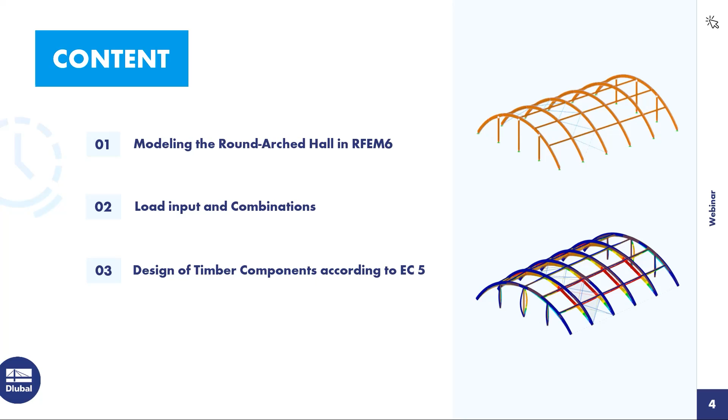To proceed with our project, I would like to go to our program RFEM 6. Here I need to create a new model, which I will name Round-Arched Hall.

The add-ons that we will need today are the timber design and also the structure stability. We also need to pick our standards. We will need the European standards for timber, also with the German National Annex. We can continue by clicking OK.

There is a possibility that for the latest projects you've done in RFEM 6, you would have here the materials or also the sections that you used before. To delete them, you can just go to the basic objects and select delete all basic objects. In this way, everything is deleted and we can continue with the model of our hall.

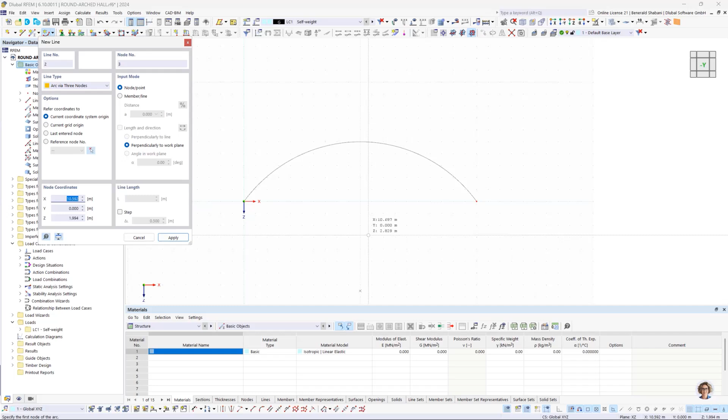First, I will need to draw an arc. To do that, I will pick here an arc via 3 nodes. Our hall needs to have a height of 5 meters and also a 20 meter wingspan. We have modeled our arc.

Now we need to have a member from it. Of course, we need to select a new section and also a new material.

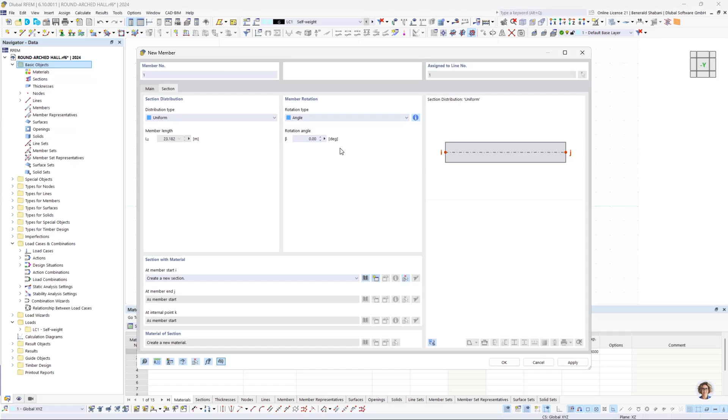We will search here in our library for the region European Union and a material type of timber. For our round arch hall, we would need a glue laminated timber, a GL28C.

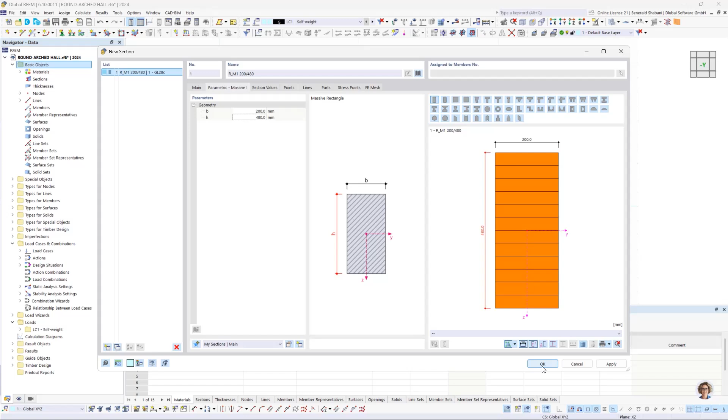As a section type, we will choose Massive 1 for us to be able to just write our geometry. In this case, we need the geometry of 200 millimeters times 480 millimeters. Say apply and OK.

And we can see that we have our truss. Of course, our truss also needs the hinge nodal support.

We just need to select the nodes and we will have our nodal support modeled. We can also see that they are a bit too small for the model to look better and for us to be able to see it in a better way. We can just make them a bit bigger. That would also look better and give us a better eyesight into the program.

Next, we want to divide our truss into intermediate nodes. We will divide it into 5 intermediate nodes. We need the nodes for the coupling. They are very important because the coupling rods should be located at these points where the nodes would be.

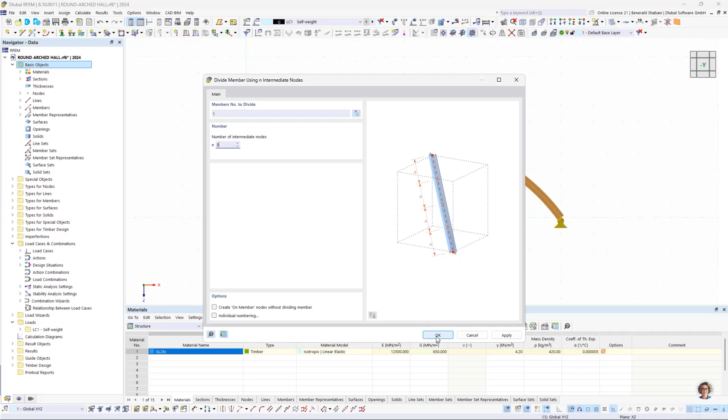We can copy the truss. When we copy the truss, we will also create the coupling rods. But we'll proceed here first with OK. We'll see that our member is divided into 5 nodes, 5 intermediate nodes.

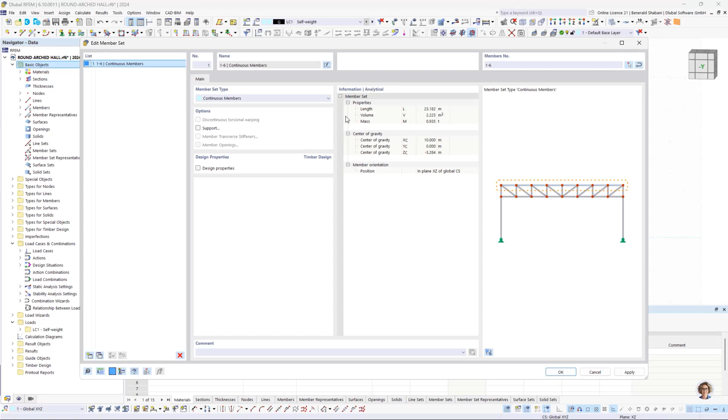Before we copy it, we first need to create a member set. Here we don't need to do anything, we just press OK, and we can see that we already created a new member set. Now we can be ready to copy our member.

To do that, we will need to check here, create copy. And for our round arch hall, we will need 5 number of copies. But as we said, where the nodes are, we will also need to have the couplings.

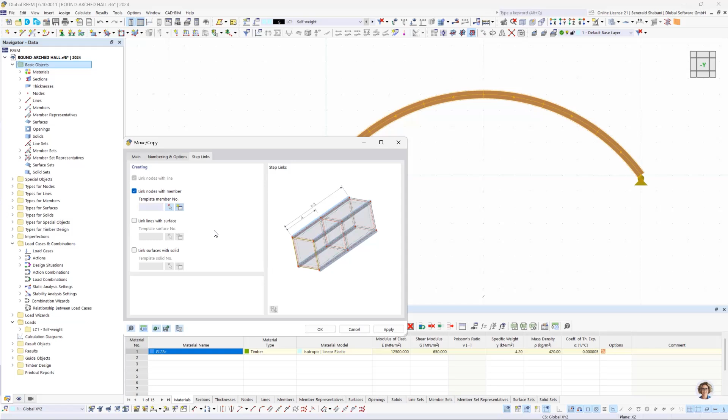Instead of modeling each one of them, we can proceed here at the menu numbering and options and check step links. Then we say here link nodes with line and also nodes with the member. Of course, here we need to also find another type of section. We go to the sections, but firstly, we need to choose our member type as truss.

We can add a new section here and say for the truss I need a geometry of 120 millimeters times 120 millimeters. We'll press OK. The material is also the same, so we don't need to change it. We just can proceed with OK.

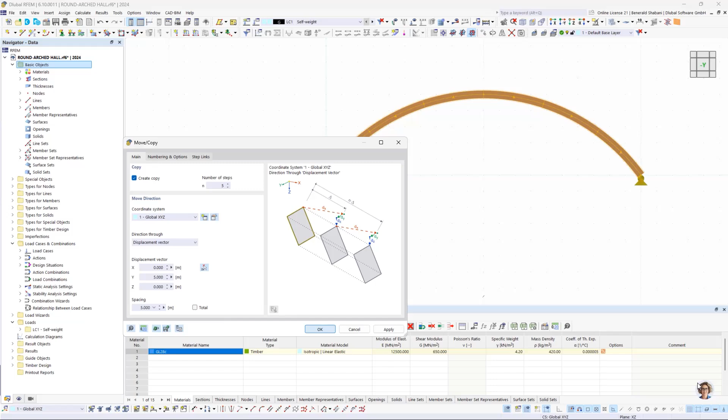And we say that I want to have my copies in Y direction every 5 meters. We'll press OK, and then we will see that our round arched hall would be modeled.

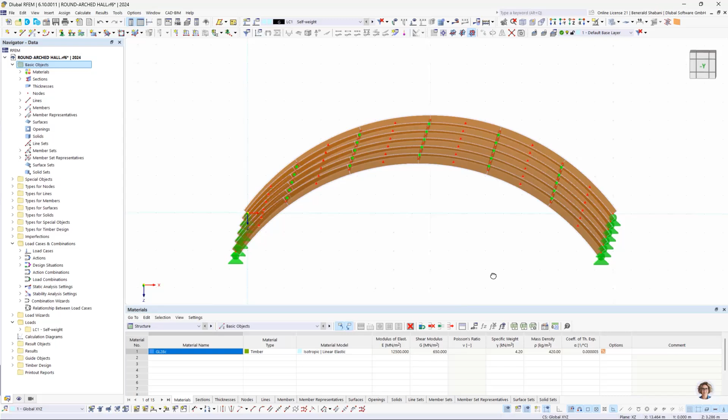Of course, the trusses here at the bottom, we don't need them, but I think it's faster this way for us just to delete them, so we can just delete them. Of course, we could have also deselected the nodes here before, but yeah, that would be just unneeded work.

We can see that our hall is partially modeled. The next thing to do is to model here the beams that will serve as gable support. To do that, I will need to find another section, but this time not anymore as a truss, but as a normal beam.

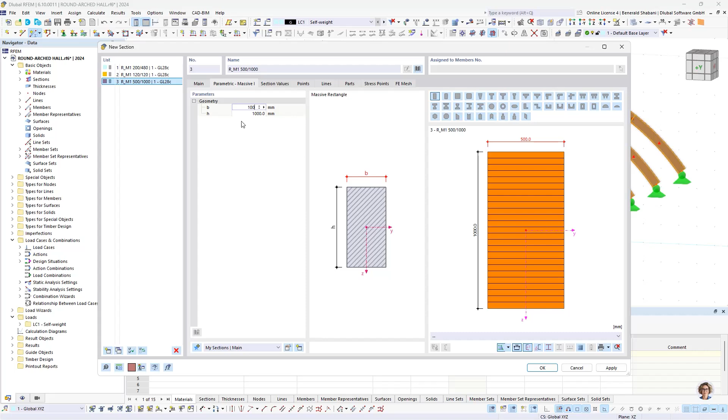Of course, for our gable supports, we will need to choose a new section, which will have the geometry of 100 millimeters times 200 millimeters. We can press here OK to proceed. The material of the gable supports can still be the same, so we don't need to change anything here.

I will first start to model them as shorter beams, and then later I will extend them until the next member. Of course, they also need their personal hinged nodal support. We can select the nodes and proceed with OK.

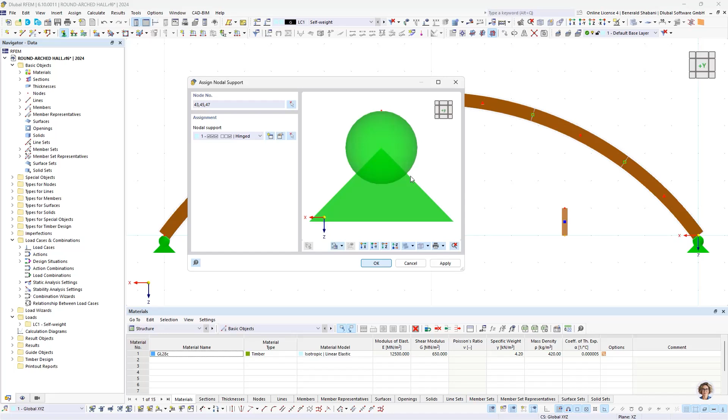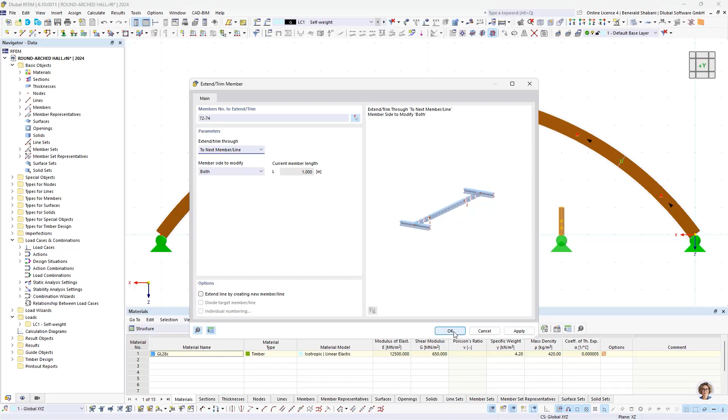To extend the gable supports until the next member, we need to select all three of them. We can find here extend or trim member until through the next member or line. We can just proceed here with OK, and we can see that our gable supports are extended to the next member.

We also need to turn the gable supports. We need to rotate them in a 90 degrees angle. That way the major axis will be in the longitudinal direction. To do that, we need to edit all three of them.

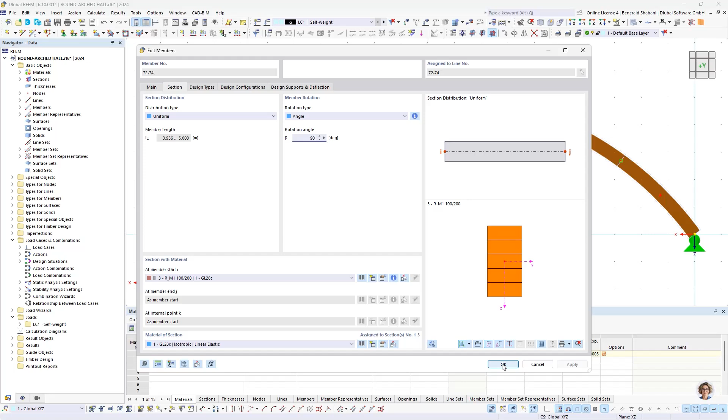We will go to the sections menu, and here we can see a part that says member rotation. Here we can just type rotation angle of 90 degrees and then press OK. We can see that our gable supports are rotated in a 90 degrees angle.

At the top, the gable support should be connected with hinges that also can be moved vertically. Later, the gable supports can be removed, for example, when the hall needs to be extended. To do that, we should edit all three of them.

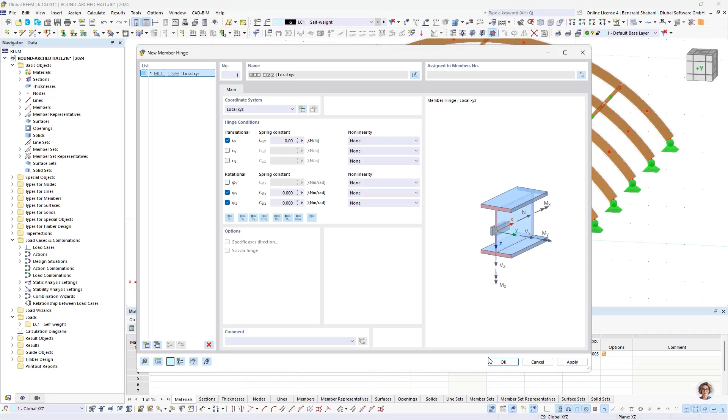And we need to check here the menu hinges. The hinges would be needed at the member end, so we will choose a new one. Therefore, we need a moment hinge around the longitudinal axis, which essentially doesn't impose any vertical loads. We will proceed here with OK. And then we can see that we have already modeled our hinges.

Of course, we need the gable supports also for the other part, so we just can copy them. We will select everything that we need to copy and go to the menu Move or Copy. We'll select here the menu of Create, Copy, and we will need just one copy. Here you need to also be careful because...

For the trusses, we also needed the couplings, and probably there is a possibility that this option is still on, so we just need to turn it off. In our case, it isn't like that.

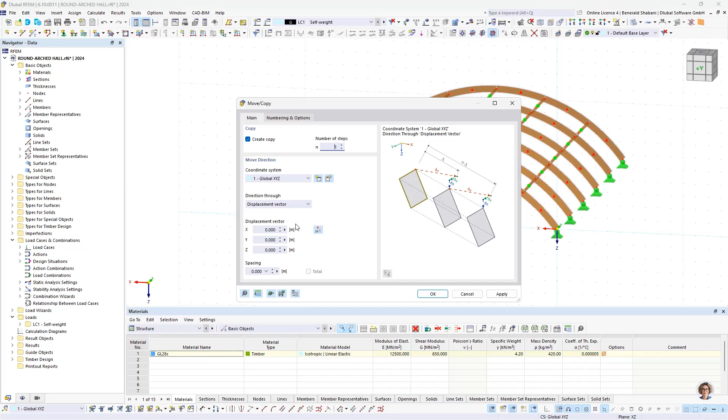We can choose our displacement vector just by choosing 2 points on our model. The first point that I will choose would be the original point, and the next point where I want the things to be copied. We'll say here OK, and then we can see that the gable supports are also modeled for the other side.

The next thing I want to do is I want the connecting rods to align along the top edge of the truss so that each rod has a different angle. To do that, I need to align them toward the center of this arc, of this truss. How does this work? We can find it now.

In our example, we can see the middle point of this arc. But if in your model you cannot see it, you can just go to the display navigator and search here for lines. And here you would see a menu that says center point. You can just turn this on and then you will see this small sign. Here I just need to put a node as a helping node.

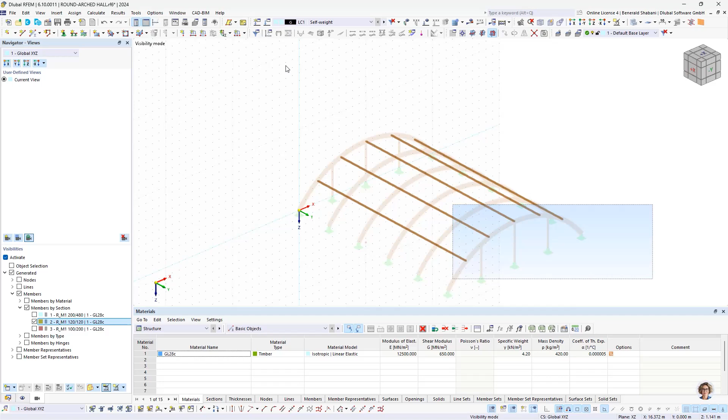And then I also need to select all the rods. You can do it in a lot of ways, just by selecting here or going to the views by visibilities. We can activate them and then search for members by section. We know that our rods have a section of 120 millimeters times 120 millimeters, so we can just see them. We select everything and then deactivate the visibilities. Now we can edit all of them.

At the menu member rotation, as a rotation type, I don't need an angle anymore, but I need a help node. We know which node we are going to select, and in the plane X until Z. We'll say OK, and then we will see that our rods have now an angle, a different angle from one another. They are also the same way as I wanted them to have.

Now, the thing that I need to do is the bracing. For that, I will create another section. As a member type, I will use tensions.

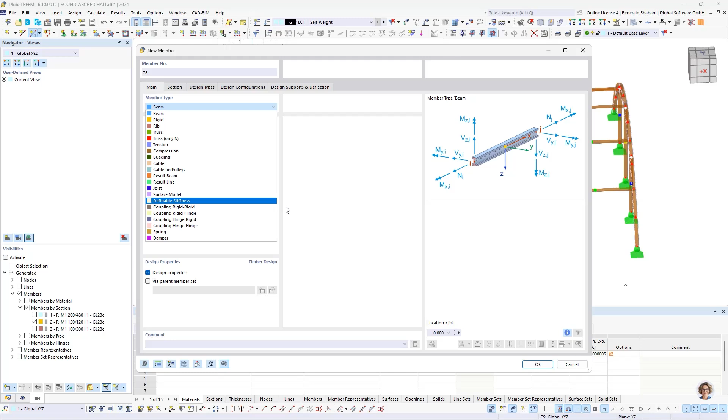Here I also need to find another section and also another material. Firstly, I will choose the next material. I will need a material for steel. Here we go firstly to the library, and as material type, I will search for steel. I can also type here S235.

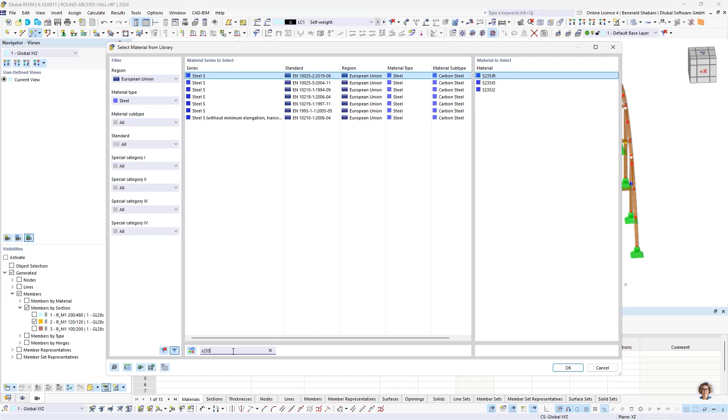I can press here OK, and now I need to look for a new section. For our bracing, I would need a round. As a section type, I would need a massive one, so I can give the diametry by myself, and I will also need a round section. We'll need a diametry from 16 millimeters. We can proceed here with OK.

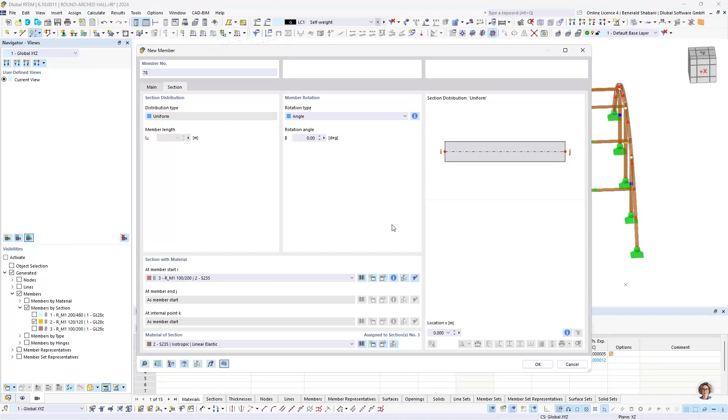And then we can start to model it. For it to be easier for us, I can put our model into a wireframe model, so I can see every node and every line that I also need to select.

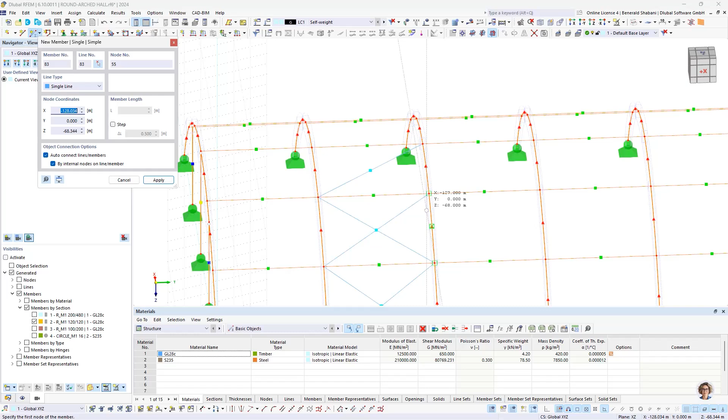Modeling the bracing can be done like this, or you can draw just one of them and then mirror the other side, or with a rotation. There is a lot of ways how to draw them. In our example, I will draw them until here, and then I want to mirror them for also the other side.

To select all of them, I just click at the blue member representatives, and then I will go to the menu mirror. I will also need a copy from it and select the plane Y, Z. I will also need to pick a point here, which would be the node here, and just press OK. We can see that our round arch hall is fully modeled.

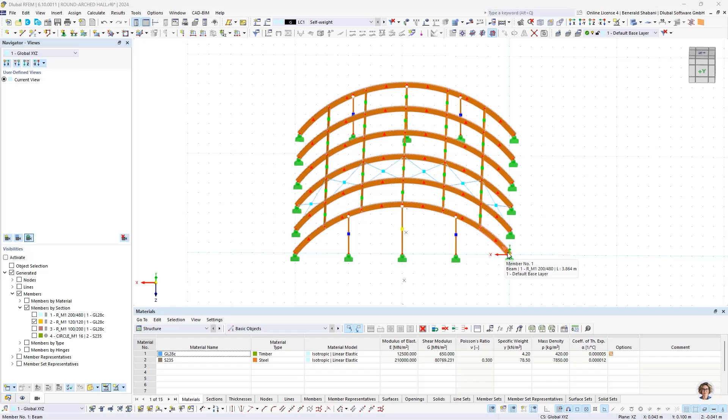Now we come to the second part of our webinar, which is also the last input. To proceed with that, I will firstly need to model at the gable supports two load transfer areas, which will help with the load transfer. They are probably the biggest advantage that we have today in RFEM and that we also use in our model. Because of the roof construction, there are triangular and trapezoidal loads that apply to the gable supports. Without the load transfer area, we would have to apply the triangular and other types of loads individually. That would be a waste of time, and it would also be a lot harder than just putting it with the load transfer.

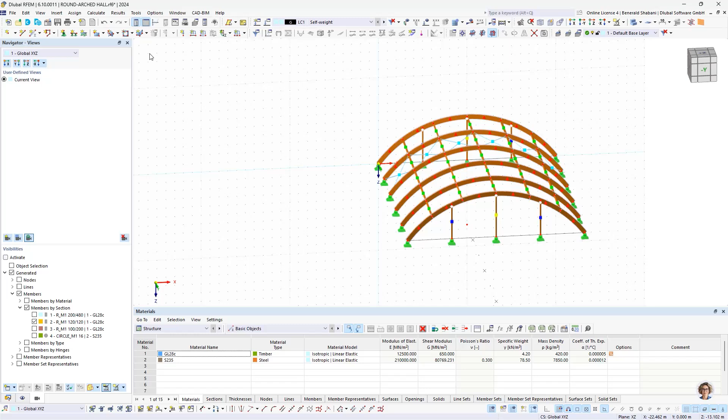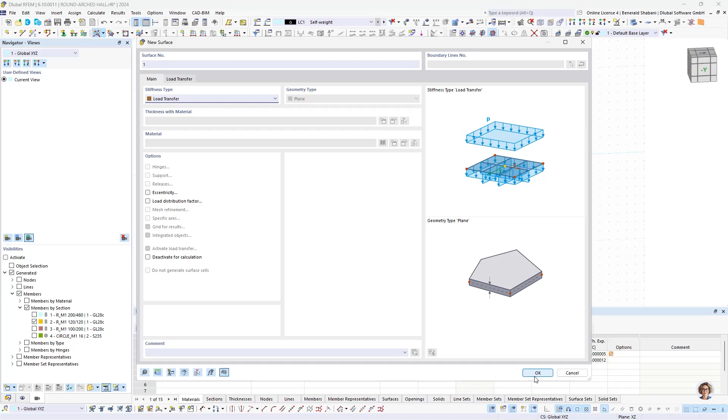First of all, I will need to draw here a line which would help me and serve as the borders of the load transfer area. Second, I can just go to the menu here and select boundary. As a stiffness type, I will need a load transfer. As you can see, I cannot say that I want a thickness or a material because it's a surface that is not there in reality. It's just there in our program to help us with the load transfer. We will continue with OK, and then we will select our boundaries.

We can see that we modeled our first load transfer area, and now we proceed with the second one. Now we also have the second one.

Our hall spans in the x-axis. That's why we also need to go to the load transfer and select the category as load transfer direction just in x stripes. That means that the surface is cut along the local axis into many surface stripes. The local axis we can see if we just put the mouse near the load transfer, and then you can see the axis. The same thing we also need to do for the next load transfer area, and then we can proceed with OK.

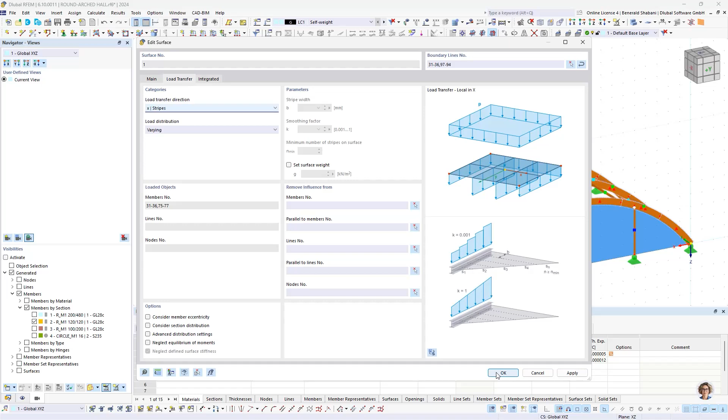As the first load, I will need here dead load and also the roof structure.

I figured that here from truss to truss there would be trapezoidal profiles like sandwiches with insulation on top and a foil roof. I assumed it will weigh like 30 kilograms. Of course, the dead load can vary from hall to hall.

I would need a new member set load and type here 1.5 kilonewtons per meter. As a load direction, it's global and Z on true length. And now I just need to select my member sets.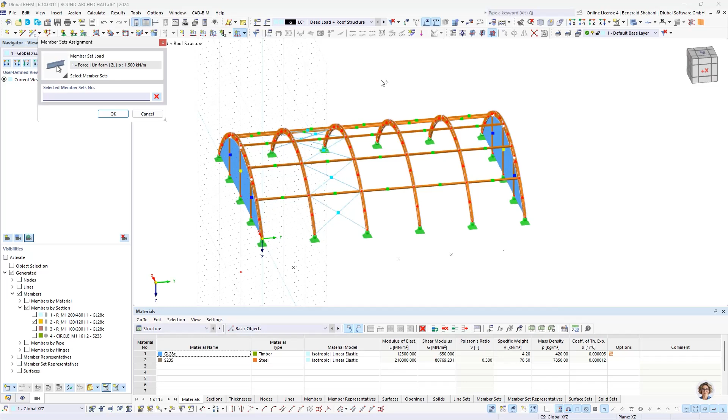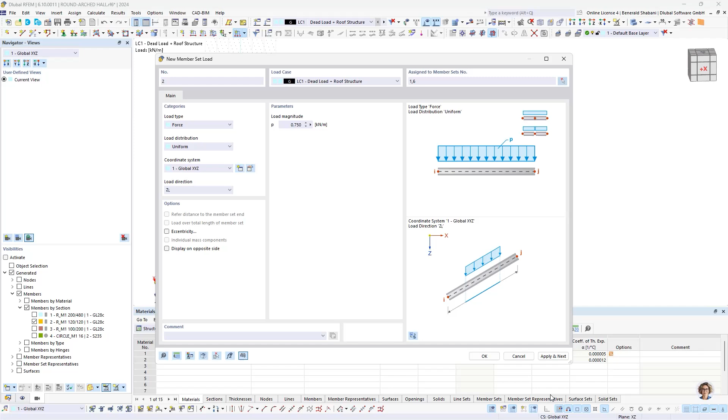We will press OK, and then we can see our load being generated. Of course, at the gable supports, it will be half the load. So we go and select a new member set load and put just half of it. We will proceed with OK. Then we will be done with the dead load and the roof structure load.

To proceed with the snow load, I would like to go to my presentation. The snow load will proceed according to DIN EN 1991-1-3, Section 5.3.5 for the barrel roofs. These standards specify two variants that must be considered: the unblown snow and the drifted snow load.

We must represent these two variants using two load cases: firstly, the snow load as a distributed load, and also the drifted snow load as a double triangular load. I cannot show the standards here because of copyright, but we have the form coefficient, the characteristic snow load, and also the influence width, that for the unblown snow equals 3.4 kilonewton per meter as a member set load.

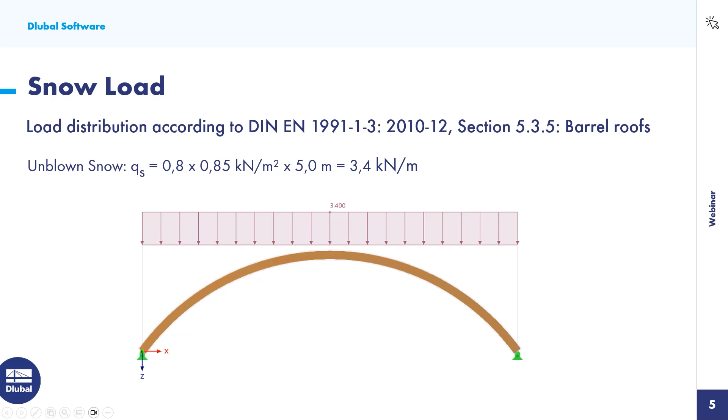For the drifted snow, of course, we have different form coefficients. Here we have a 2.0, which will equal 8.5 kilonewtons per meter, and also as a second part, the half of it.

To proceed with the snow load, I will also go again to the program and select here a new load case. As an action category, I will need to choose here snow and confirm with OK.

Of course, I will need a new member set load, and then type here 3.4 kilonewtons per meter. Now, as a load direction, according to standards, I need to choose a load direction global in Z on projected length.

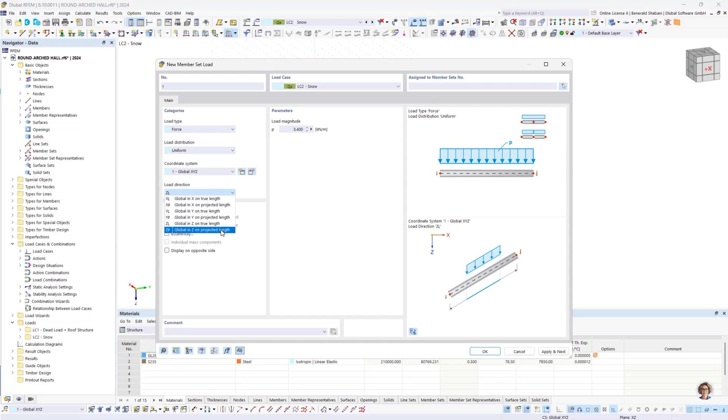And now we just need to select our members. We can proceed here with OK, apply and next, and then we can see that our load for the main trusses is modeled.

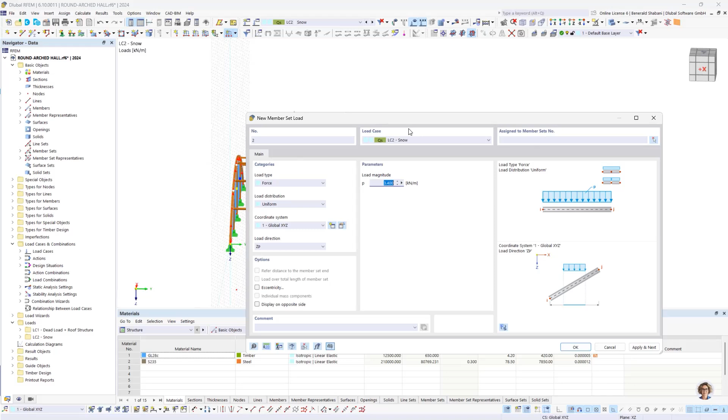And then say here that at the gable supports, I have just half of it. We also select the gable supports and then proceed with OK. This way we are done with the unblown snow load.

Now we can proceed with a new snow case, which is the drifted load. Of course, I need to put here a new load case, which I will name drifted snow load.

As an action category, it can stay this way, I don't need to change it. I just need to proceed with OK. And then select here once again, new member set load.

We said that here we have a double triangular load. So to be able to put this type of load into our program, we need to choose as a load distribution varying, and then we can just type our parameters by ourselves.

Then we start here at 0 meters, which we also have a force of 0 kilonewton. At 5 meters, which will be the first value of our load. Here we have half of it.

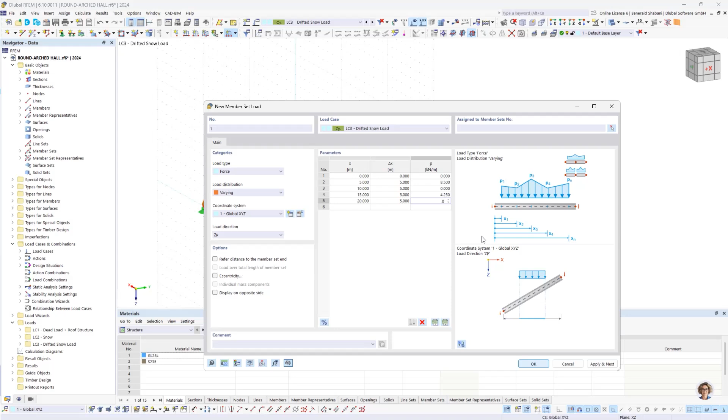Now we just need to choose once again the members that we need the loads on. We can proceed here with apply and next and see our load generated. Of course, at the gable trusses, we need half of it. We can proceed here with OK, and yet we are done with the drifted snow load.

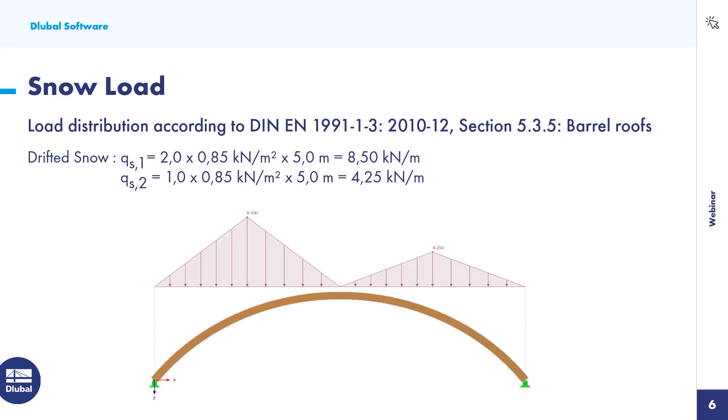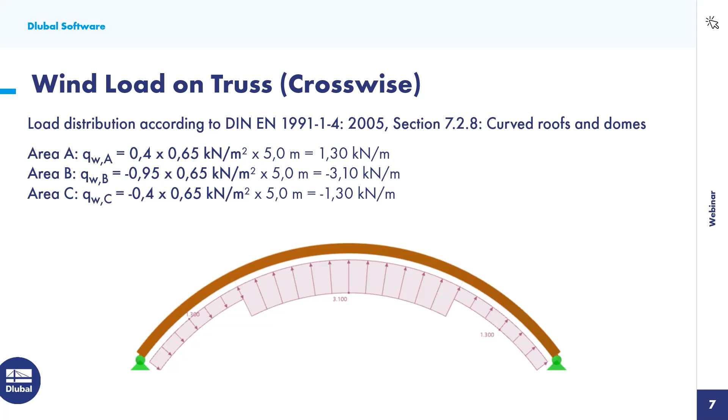We will also look at the benefit we have in RFEM 6 with the area we had on our gable supports, where we calculate our load distribution according to DIN 1991-1-4, section 7.2.2, for vertical walls of buildings with rectangular floor plan, which gives us a load magnitude of 0.52 kilonewtons per square meter.

To input this load, I first go into our program again and select a new load case, which I will name Wind in plus X direction. As an action category, I don't need snow category anymore, but I will choose wind here, and press OK.

Just like we did for the drifted snow load, I will need to use a new member set load. As a load distribution, I don't need uniform anymore, but varying. Of course, the first thing to do is know how long one of our trusses is. In RFEM 6, we have a lot of ways to do that. The simplest way is to go to the table for member sets and look at the length of each member set, which is 23.2.

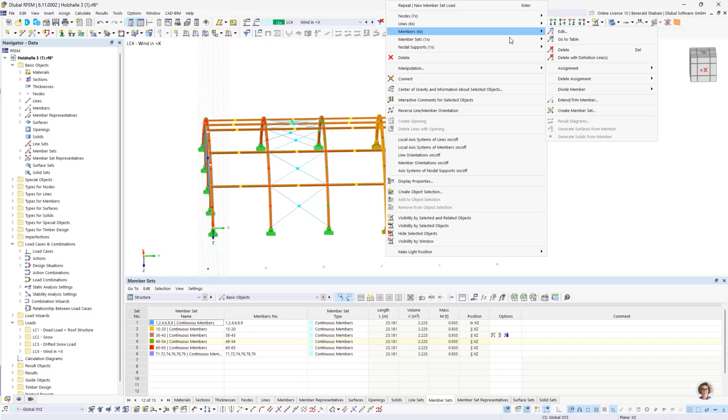Or we can select one of the member sets and edit it, and here we will have the length, which will be 23.2.

We can continue with the input of our load. As I said, we need a varying load, in local coordinate system for the load to be perpendicular to our trusses. We will start here at 0 with the value of 1.3 kilonewton, and at 5.8 also with a value of 1.3 kilonewton. Here we will have our wind draft, and here it will be the end of our truss.

The next thing to do is select the member sets where we need to apply our load. We can say here apply and next, and then we can see that our load has been generated.

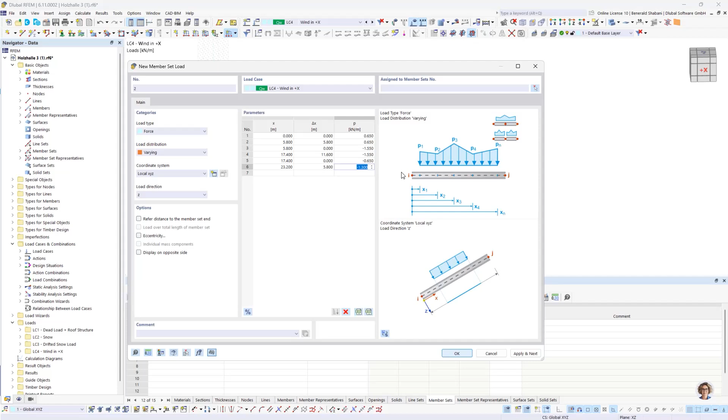The next thing to do is apply the same load with half the values for the gable supports, and I can just change the values here by adding 0.65, also 0.65. As always, we need to select our member sets, and then continue with OK. Here we have our load that has been generated.

Now we continue with the load on our surface, which is a load distribution area. As we saw in our PowerPoint, we will have a load magnitude of 0.52 kilonewtons per square meter, as a load direction global in X on true area. We will select both areas and then continue with OK.

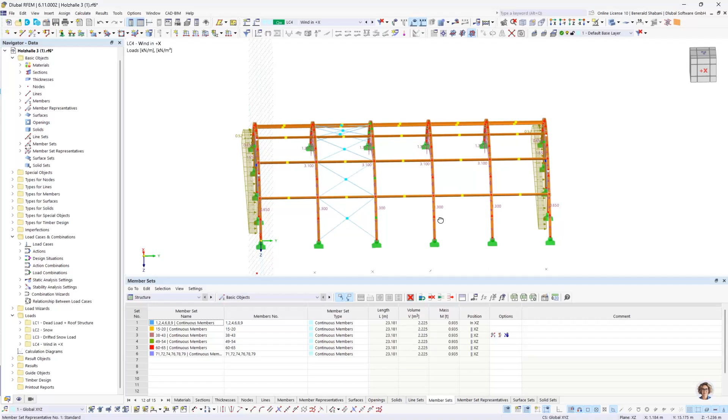We can imagine a bit how our wind is going to go in X direction, which tells us that the load on the surface here is in the wrong direction. To change that, I will just add a minus here, which I will confirm with OK. And this would be our load for the wind in the X direction.

To look at the benefit we receive from the load distribution area, we will need to go to the display navigator and search here for surfaces. We will have a small menu that says loads from distribution surface. If we check this, we will see the distributed loads, where there are triangular loads and also trapezoidal loads that come from the roof structure.

Back in the days, we used to input all of these loads manually because there wasn't a faster way. But nowadays there is a way faster and also easier way that we have with the load distribution area, so we also use it.

The next thing to do is to apply the wind load in the Y direction, like in the other direction. To do that, I will first go again to our PowerPoint.

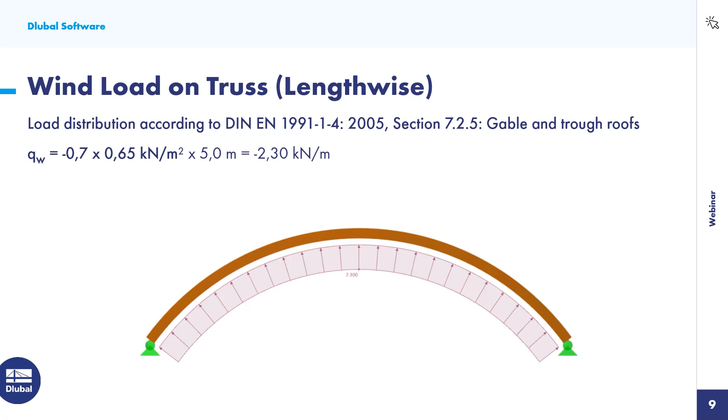Just like we saw for the other type of wind, we also need to look here at the wind load on the area in Y direction, which would be according to DIN 1991-1-4, section 7.2.2, for vertical walls of buildings with rectangular floor plan.

We'll have here as the first area, which I named D because this is also how it's described in the standards, where we see a CP value of 0.7 and we have a load magnitude of 0.46 kilonewtons per square meter. And also the next, which is also the second area, I named it with E, where we will have 0.3 as a CP value, where here would be the wind draft on the area.

To continue with this wind load, I will go again to our program.

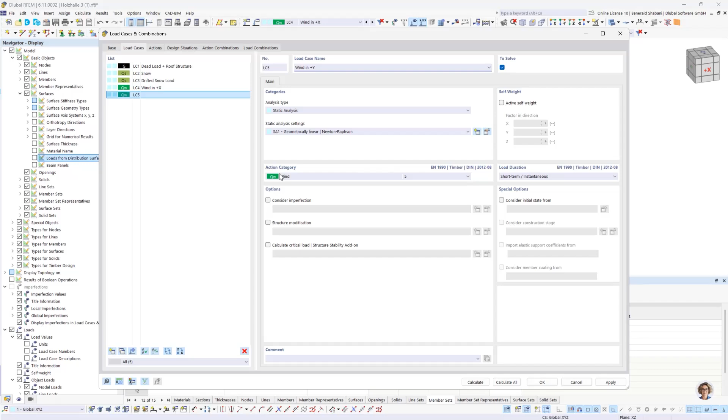Just like we did for the last case, I need to add a new load case, which I will name wind in plus Y. As an action category, I don't need to change it, it's fine, and I can proceed with OK.

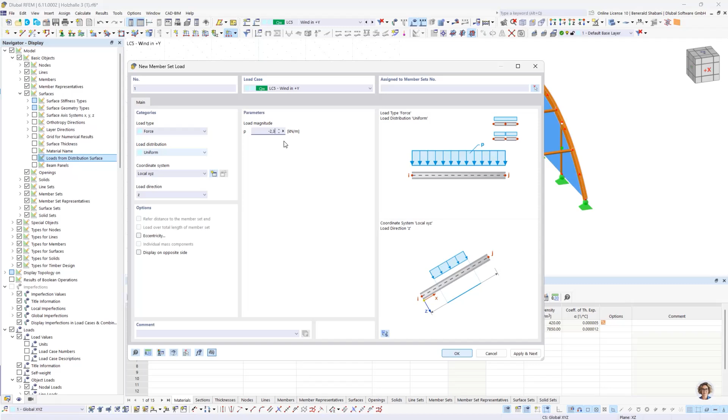And start inputting our load. I need a new member set load, just like always, but this time I don't need a varying load distribution but a uniform one. I will put our value from the PowerPoint, which was 2.3 kilonewtons as the wind draft, and select all our trusses that need this load.

We can select apply and next. We can see that our load has been generated, and then we can change the value for half of it in the gable support part, which will be 1.15 kilonewtons per meter. Just like always, we select the place where we want our load to be and proceed with OK.

Also, don't forget, for this part we need a coordinate system as local for our load to be perpendicular, like with a 90 degree angle to our truss. This was the load on our trusses.

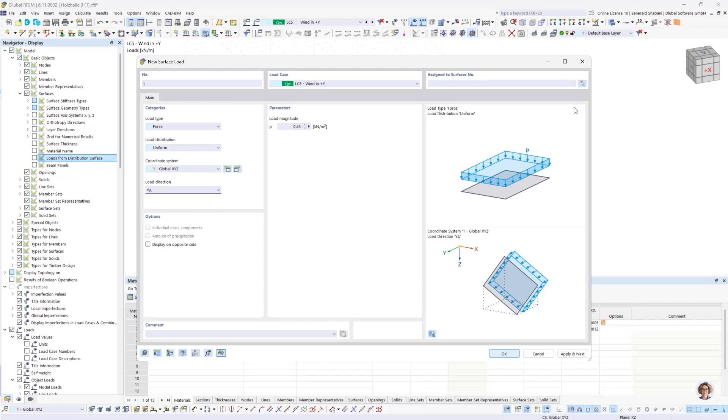Now we need the load on the surface areas, where I need a new surface load. Just like we saw from the PowerPoint, for the first area I need a load of 0.46 kilonewtons per square meter, with the load direction global in Y on true area. I just need to select the first load, continue with OK, apply and next.

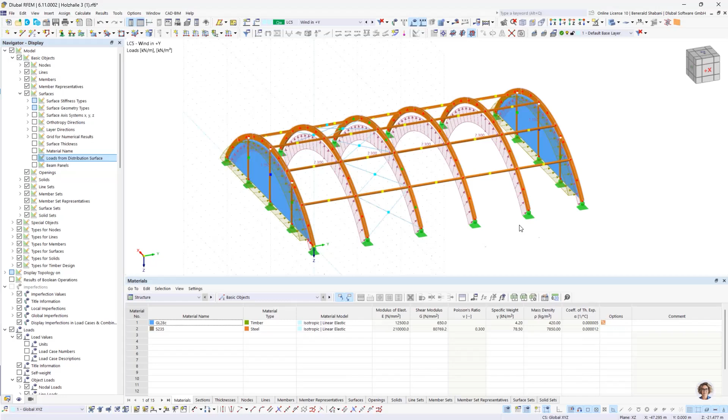Check if the load is being generated, and then apply the next load, which is 0.20 kilonewtons per square meter. I'll proceed with OK, and that's how I'll be done with the load in the Y direction.

The next thing to do is to apply the imperfections, where I will go to the imperfection section and select new imperfection case. I can just name it imperfections, of course you can name it as you wish. I need to be sure my imperfections are set active, and then continue with OK.

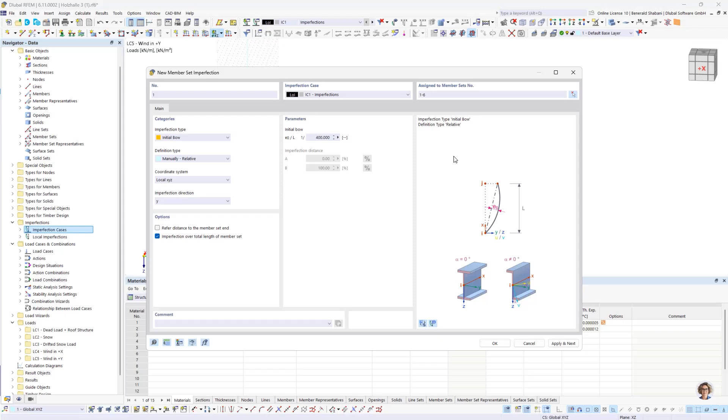I will need a new member set imperfection, of course as an initial bow, manually relative, which will be with a value of 1/400th. As an imperfection direction I will choose local in Y, and then select all the members we have. Of course we could have done it manually by typing 1 until 6, but this way it's easier.

We see that now our imperfections have been set. The last thing to do for the load input and combinations is to apply a bracing for the tension rods.

Which of course would be easier for me if I could just see the tension rods, for it to be easier to apply the bracing.

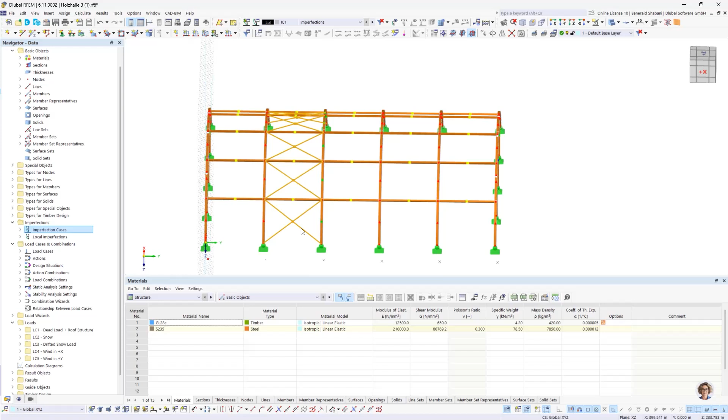To do that, we have a lot of ways in RFEM6. One way could be to press on the member representative, which I can select every one of them, and then say here visibility by selected objects for me to be able to see just them. Or I can go to the visibilities and activate them, say by members, members by section, and choose the round section.

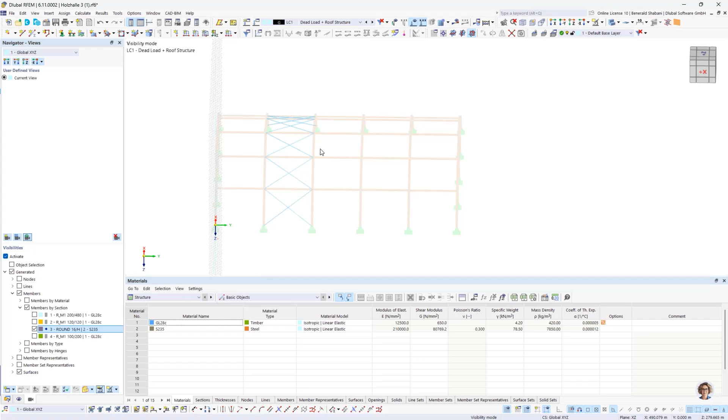Our bracing belongs to the dead load and roof structure, and here I need to set a new member load, where as a load type I will add an initial pre-stress, which will be 0.5 kilonewtons, and assign it to all the members I want. Check if everyone is selected, it looks good, and then I can proceed with OK.

Now we are done with our load input and the combinations, so we can start with the design of the timber components.

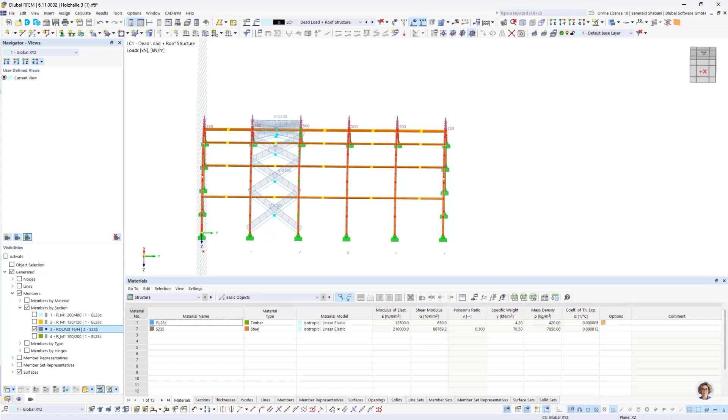To do that, I will need to go again to my PowerPoint. For the design of the timber components, we will also be looking at the stability control according to proof 6.3.2, which is the proof for flexural buckling, and also at the lateral torsional buckling, which will be the proof 6.3.3.

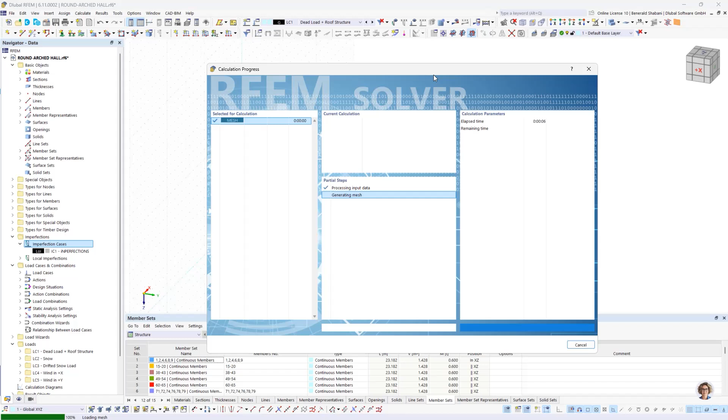To continue, I would just need to go again to our program, and to see if we made a mistake or something, I will calculate everything, so we can also see the deformation for every load case. Also, if we made a mistake, our program will notice it and say that something is wrong. Of course, because we are calculating everything, this will take a bit more time than just calculating a singular snow load.

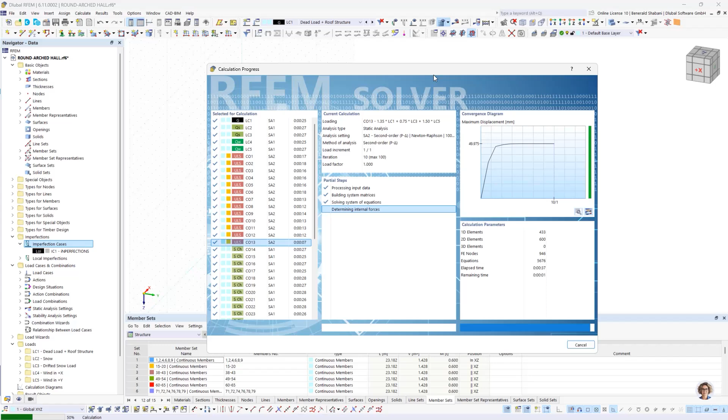We have here all the deformations where we can look, and also like local deformations or strains, internal forces.

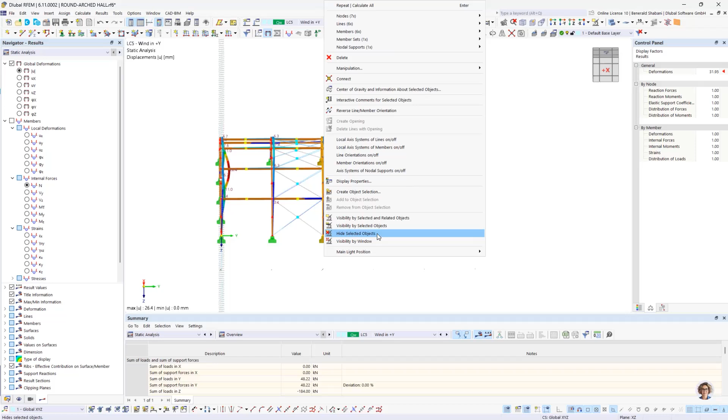We see here that we have too much information, so we need to shorten up some things. For the design of the timber components, I don't need to look at the entire hall, but I will just look at one of our trusses. And then from this truss, I will look at the stability control. To start with it, I will just select this truss here, and I want to see just this truss for it to be more easier.

First of it, we need to check if the member orientation is correct. To do that, I will need to go here to the display navigator and search here for members and say here member orientation. And we can see that our member orientation is the same way as I wanted to, it's correct.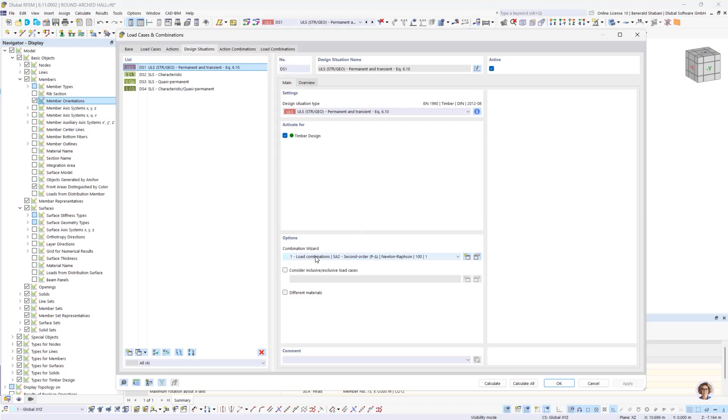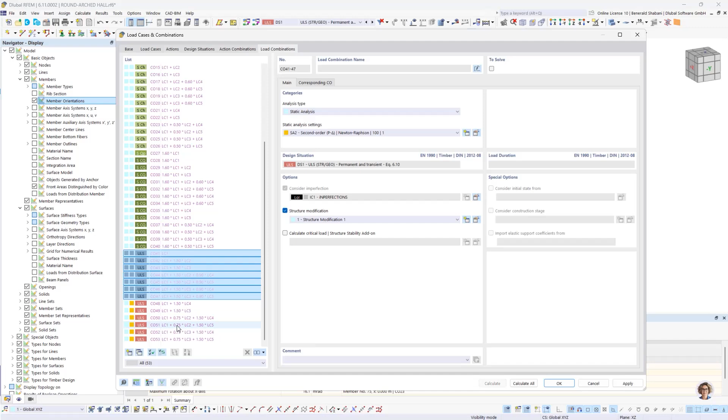I will take a look at our load cases, where here we have a lot of load cases that we will not need. Firstly, I will go to our design situation, and at our combination wizard, I will need to edit it, and here we'll have a part that says options 2, and I will need to check here favorable permanent actions, which would be there for the lifting loads, and press OK. Looking at the load combinations, there are just these two loads that I will be looking at. So the rest of it, we can either leave it this way, or we can just select all of them, and we can say here that I don't want to calculate them, and continue with OK.

To start with the design of the timber component, we will need to edit our member set. And we will see here design properties. We will need to check and go to the design types.

Here we have the effective length, where we will need to add a new effective length. And here is the menu where it gets interesting. We say to the program, I will make a stiffening disc on top of it, and then I just need to prove the buckling around the major axis. So the flexural buckling around the minor axis and the lateral torsional buckling, we don't need to look at them for now. If we go to the menu nodal supports and effective length, we will see that here we have an effective length factor.

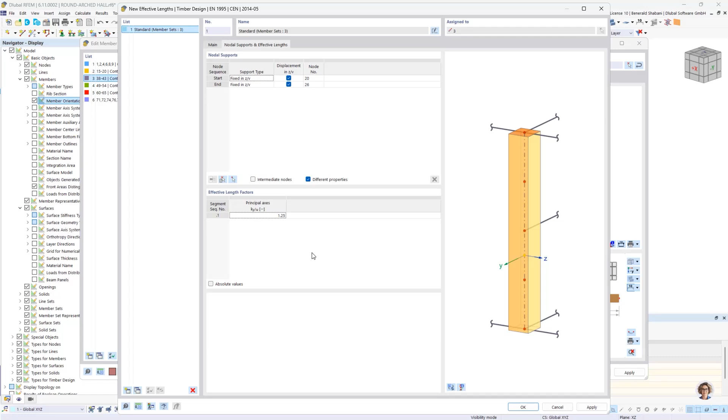Which according to the standards, we need to calculate it. Of course, I calculated it before we did the webinar, and for our round-arched hall, we will have an effective length factor of 1.25. We can select here with OK, and then go to the summary.

We'll go to the timber design. For the stability control, we always just need to consider the ultimate limit state. The rest, I don't need to look at them because this would be deflection, and we don't need the serviceability limit state. Of course, I also don't need to calculate every single truss, but just this truss that I have here. So I will go to the menu Objects to Design and deactivate everything.

And here I will search for the member set, where I will go at the selected objects and just select our member set. Now I will proceed with the calculating of our member sets. Where we can see that every proof is successfully achieved.

Therefore, we will receive here a warning that says that the equivalent bar method cannot be used as standard, and that is why I can say I can stiffen it, and then all I have to do is to check the flexural buckling around the major axis. For that, there is a proof according to German standards, which is the proof 6.3.2, which can also be used for the equivalent bar method, which would be the proof here.

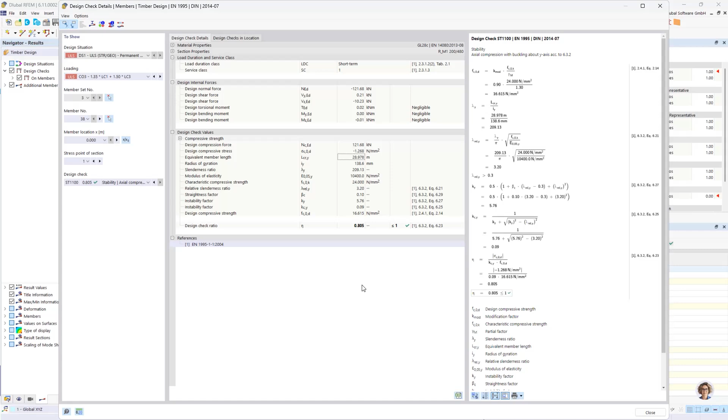If we look more into it, we can see here that at the design check values, we'll have here the equivalent member length, where we will have a length of 28.9 meters, which, if we remember, we had a true length of 23.2 meters. That means that our member has now extended from 23.2 to 28.9 meters, which is the factor of 1.25.

If we try to use the value of 1, the value will still meet the requirements. However, it's not correct according to the standards. To see that, we can also go again to the member set dialog and go there to design types. And here we will continue with an effective length factor of 1.

As I said, the proofs will always be successfully achieved, but that is not correct according to the standards. Therefore, I'm using the equivalent bar method, which means I have to assume that it's braced and enter 1.25 as an effective length factor.

Normally, we don't have formwork, but rather compression supports or purlins that act here on this side, and we want to look at these for the stability. Therefore, with RFEM 6, we have the option of using the eigenvalue method.

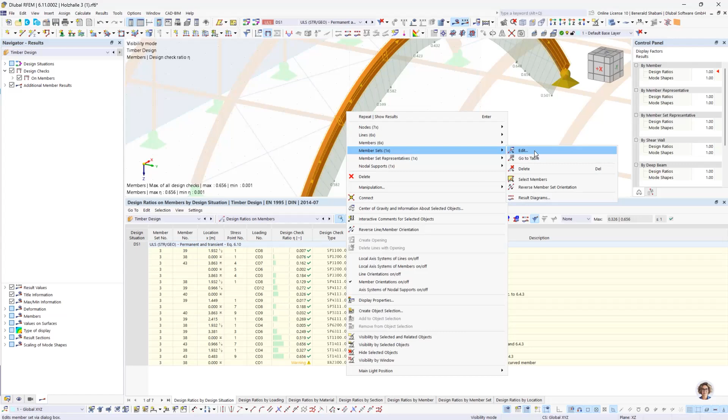To continue, we go to the same dialog again, edit our member set, design types, and say we don't need the flexural buckling around the major axis, but the lateral torsional buckling with the eigenvalue method. If we don't enter anything here, it will be calculated as an unstiffened beam. We can try it out, say OK, and then calculate.

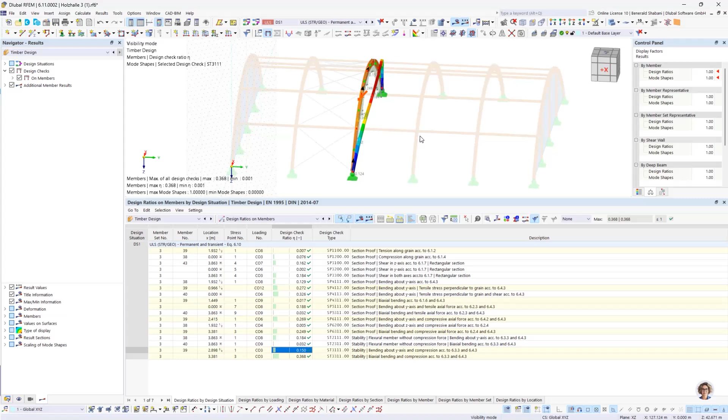We can see that every proof is successfully achieved, including proof 6.3.3, which is the proof for lateral and torsional buckling. Of course, in reality we cannot build our hall this way, but we can show our bending picture. To bring our model closer to reality, we will need to go again to our member set dialog.

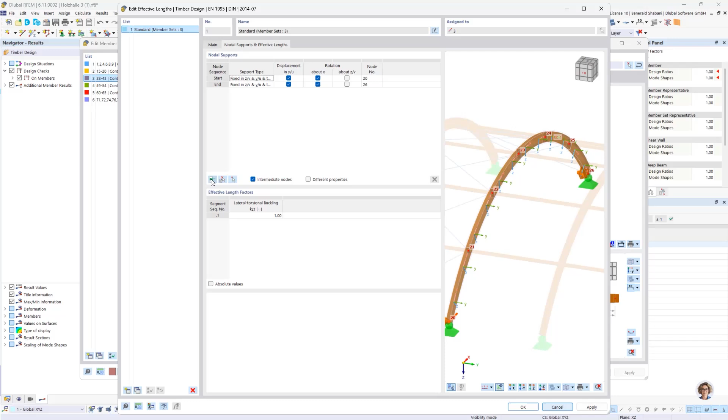Probably showing it this way will be easier for you to understand what I want to explain. Here I will select the intermediate nodes, and we saw that from the beginning we have 5 intermediate nodes, so I will add 5 of them. The nodes will be there for us to make supports which will imitate the purlins, bringing our model and truss closer to reality.

We will say here that they are held in the Y direction, and in this way we can also imagine that here they will imitate the purlins. We can press OK, and then calculate again our member set, where we will see that every proof is successfully achieved.

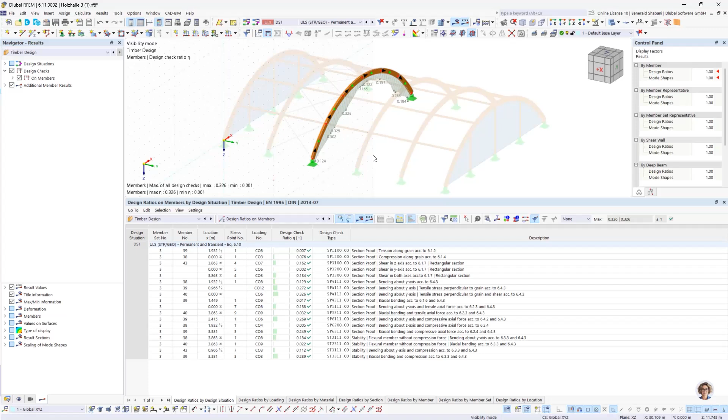Also with RFEM 6, we have the possibility to do something to bring our model even closer to reality, at the supports where they imitate our purlins. Of course, the purlins will not be set here, but on the top of it. So we have the possibility with RFEM 6 to select an eccentricity type.

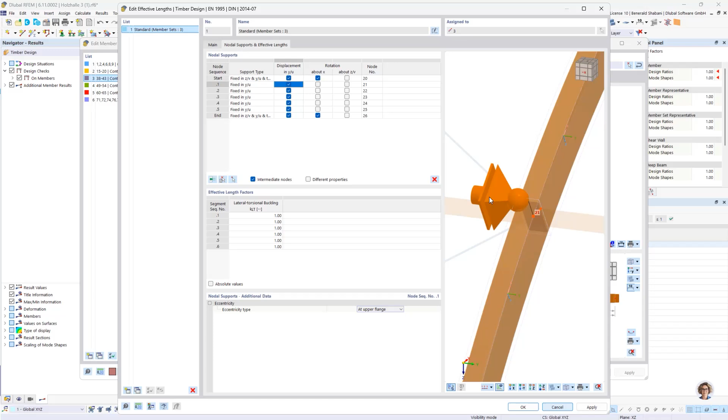Which I can choose, for example, at upper flange. Here, if we look at this support, we can say that when I pick the eccentricity type as at upper flange, it will go up a bit, which will imitate even better the purlins that will be here.

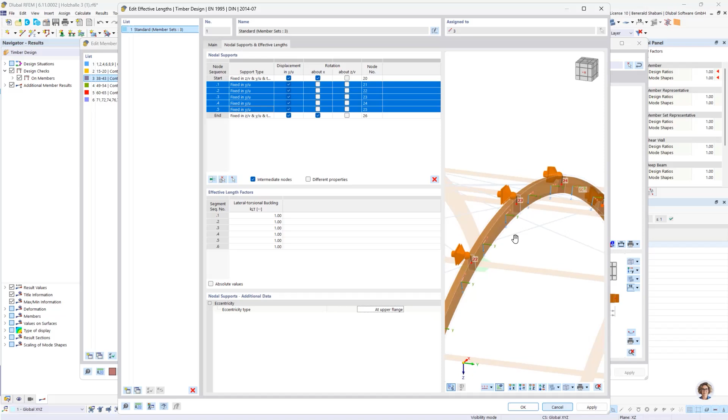For this, I can do the same thing for all the supports that imitate the purlins. To do that, I can just press the Shift key and edit all of them at the same time, and say for all of them at upper flange, where we can see that every single support is a bit more up, and press OK.

We can also calculate it again and show our proofs, which are of course successfully achieved. In this way, we brought our model closer to reality. If we look at proof 6.3.3, we will see the proof where alpha crit is determined, which will be the calculation here.